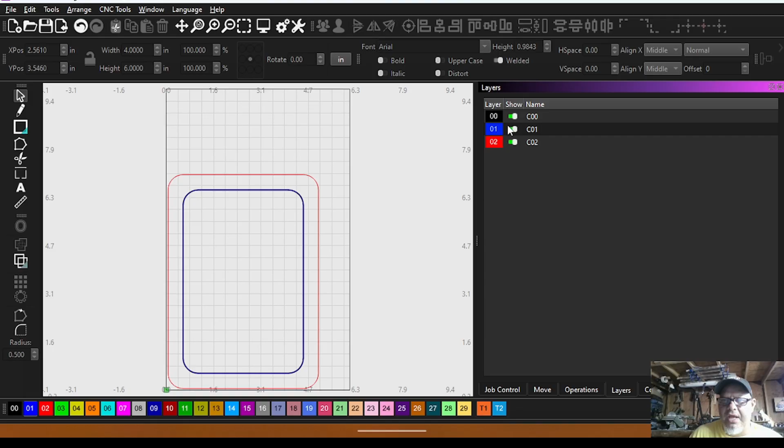So what I did was I went to the black layer. Let me turn off the other layers, the blue and the red, so I'm only looking at the black. And what I did was I selected it. Then I came up here and I hit new operation. Hit pocket, and I changed that to black fast. So you would put that in there. Pick your tool, so the ball, which is the bowl bit.

And you want to start out at the top, so you want it to be the start layer. The start depth is going to be 0, and then the bottom one, I wanted to go a total of 10 millimeters down. So for me to do that, I had to go 9. I went 1 millimeter less than what I actually wanted it to be. So I'm going to change that to 9.

And my depth per pass, you can make that whatever your settings are going to be. You have to test it, but I'm going to go 3 millimeters for depth per pass. So I'm starting out at 0, final depth of 9, and my depth per pass at 3. And my step over, I want to change that because this is the fast one. I want to go as large as what I can, which is going to be 50%. So leave all the rest of this the same, and then hit OK.

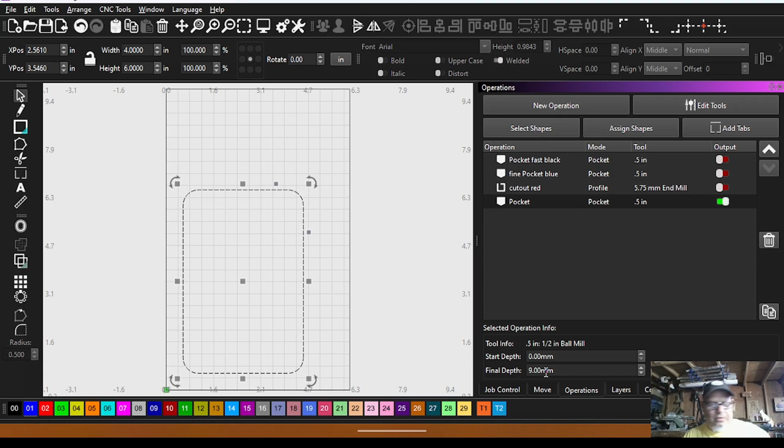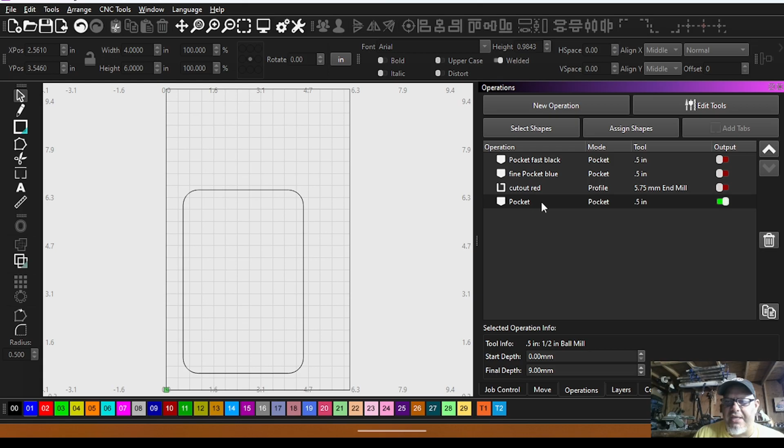Because when you do the next one, that's going to be your fine. It's going to go down and make it real smooth, and it'll need very, very little sanding. So, back to MillMage, and there we go. Now that's going to be your pocket. Remember, it's going to say pocket fast black. You're going to write that in there so you know what it is. I'm going to go ahead and delete that one. That was just to show you.

And I'm going to do one more. We're going to go into layers, turn off the black, only show the blue, go back to operation. We're going to highlight it, and then go back to new operation, and we're going to do a pocket again. Select tool. It was already shown there, but we're going to select it anyway, the 0.5.

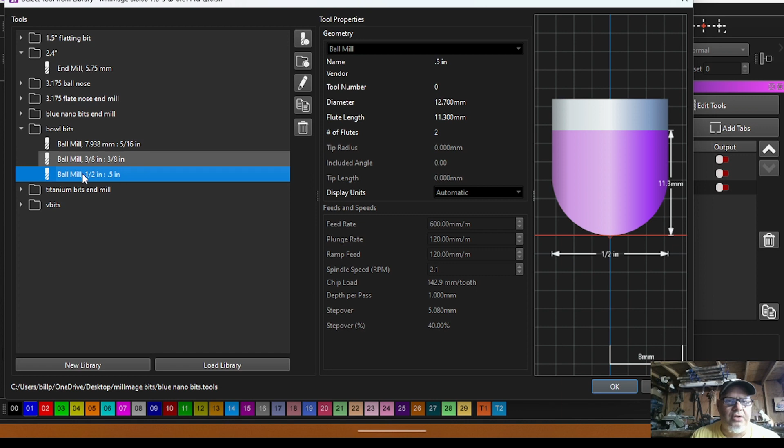Now we want to go 10 as our final. So you're going to want to leave 1 millimeter. You're going to start at 9 because you can't start at 10. So you got to start at 9, and you're going to go down to 10. That's going to be our finish. This is where we stopped the fast one, so we're going to start where we stopped, and then finish where we actually want to finish, which is 10 millimeters.

Now this is where you're going to want to change that to 3, 4, whatever. Of course, the lower this number, the longer it's going to take. It's only doing 4% of that ½ inch bit, so it's going to take a long time. But if you want that smoothness with hardly any sanding at all, then you're going to want to make sure that is what you're doing.

Leave all this the same. Actually, since this is a fine one, there's not much that's actually going to take out, so I'll go up to 1,000 feed rate, and I'll leave all that the same. The depth per pass, we do not want 10. I'm sorry about that. We want that to be 1. So we're going to start out at 9, and we're going to finish it at 10. Okay?

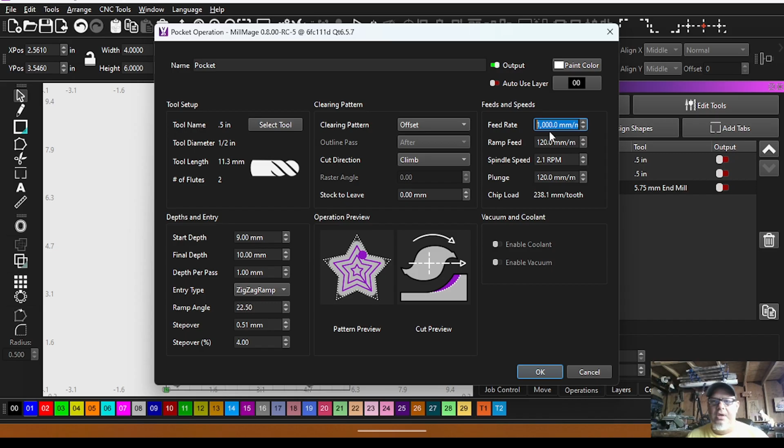So it's going to start, go down to 9, and then cut all the way out to 10, with a depth per pass of 1 millimeter. So it's going to actually cut that out in one time. And like I said, you want to make sure you change your step over, and change your speed to what you want it to be. Do your testing, make sure you've got your own feeds and plunge rate and all that figured out. Then you're going to hit OK.

Now I'm going to go ahead and delete that one. That is how I set them up, so I already have them up here. If you click on the black fast pass, you're going to see exactly what I told you. We're going to start out at 0, finish at 9, and go down 3 millimeters to do that.

And I'm going to use the highest step over that they have, which is 50%. And then I have the speed changed to 800 millimeters a minute. It was able to handle that absolutely no problem.

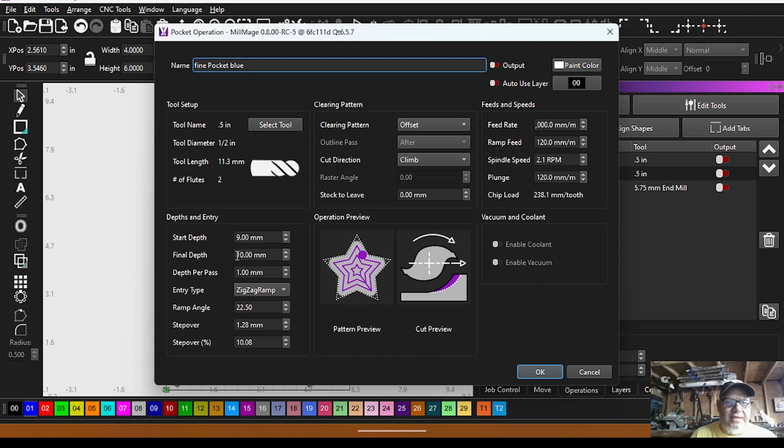Now the next one is the fine, the blue fine pass. You'll see I used a 1/2 inch bit. I started it at 9 because that's where I finished the fast one, and my final depth is going to be where I want it to actually be, 10 millimeters. I went down 1 millimeter depth per pass. My step over, I did 10 because I didn't want to spend too much time on a video for that, but if I was to do it properly it would probably be somewhere around maybe 4. I don't know, you have to test your own. But somewhere around 4, and all these settings are all going to be good for that.

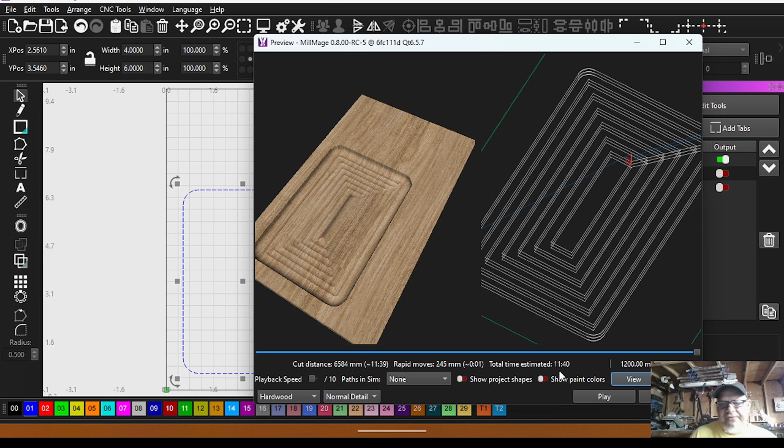Now if you click on the fast one, this is what I was showing you on that red cedar. If you click preview, it's going to take 11 minutes and 40 seconds to cut this out. Now this piece is 4 inches by 6 inches. That's exactly what I showed you on that red cedar, how you have those grooves and all those edges. That's what it's going to do - it's going to aggressively take out as much as it can.

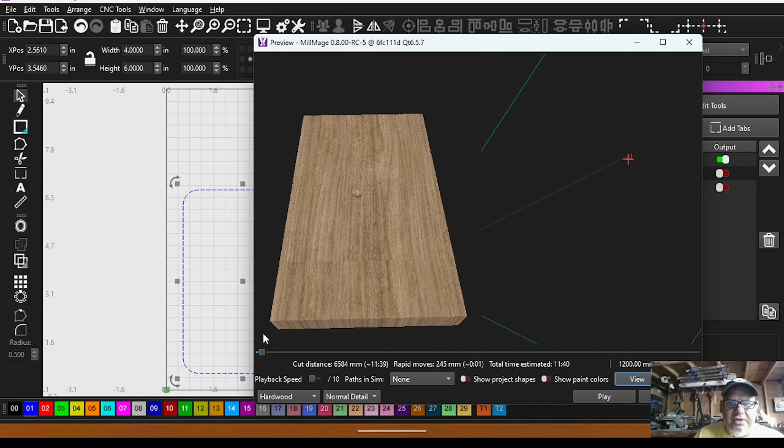So when you go through it and look, you'll see it's just going to start and go, taking out as much as it can, which is perfect. It goes down 9 millimeters and takes out a whole bunch of that material relatively quick.

Now if I go to the fine and click on it - actually, did I click on the wrong one before? Let me go to pocket fast. Let me turn these other layers back on. There we go, the fast black preview, that is what it's going to look like. You're going to see that. So it's got all that, 11 minutes and 40 seconds.

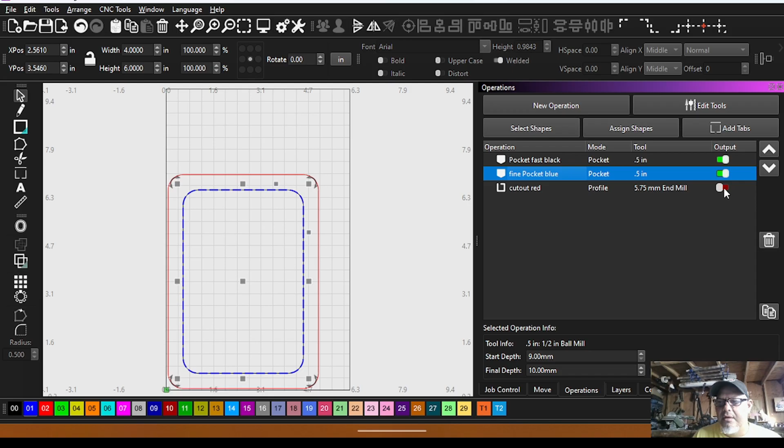And now if I click, turn the outputs on both of those, and click the blue - this one is going to take longer, you see, 47 minutes and 51 seconds to do that 4% step over.

But as you can see, if you zoom right in, you have hardly any of those lines going around. And you can do this real aggressive and real fast, so it works perfect for it.

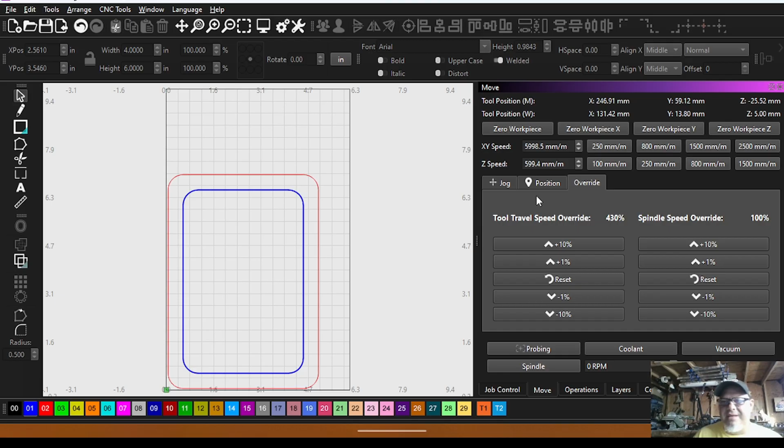Even though it's going to take more time, I was actually able to hit the move button here and override it, just keep increasing the speed. So I was actually going well faster than 1,200 millimeters a minute. And it didn't take but maybe 20 minutes when it was all finally said and done for the fine part, instead of 47 minutes, just by increasing that.

And you're going to want to listen to your machine, listen to see if it's chirping at you, make sure it's cutting okay, it's not smoking, and the wood chips are cutting out the way it's supposed to. You can increase it to whatever speed you need at that point.

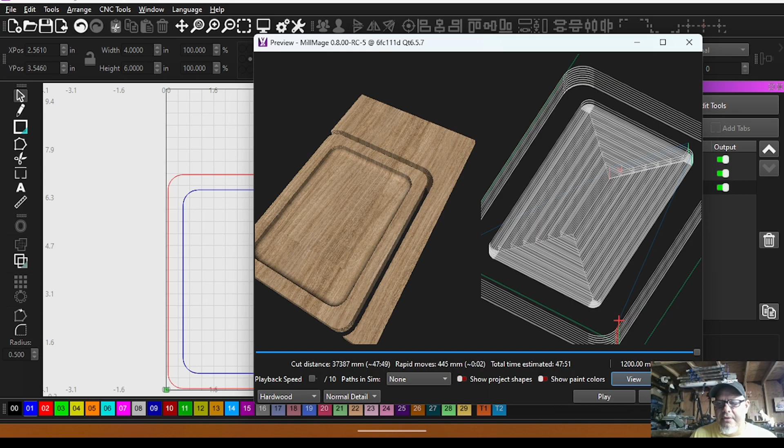So that's the fast black, the fine blue, and now we have the cutout, which is going to be this guy right here. A 5.75 millimeter end mill is what I used, and that took - no, that ain't right, let me go back and turn those off, put on this. That took 10 minutes and 46 seconds to cut that out.

I screw my wood to my board because I don't go all the way down to the bottom to cut it out.

I don't want to keep cutting my spoil board out, so I'll go down to about a millimeter or two, then take it to my planer, flip it upside down, and plane it gently to cut the rest of the wood out. Once it's almost all the way cut out, you can pop it out and sand it on your belt sander. That's the way I do it. No tape, sometimes tape, sometimes clamps, but I just screwed this down. It was much easier to do it that way and then plane off the rest.

Now Gavin, I think what you were asking is how do you get to the bowl bit, how do you add the bowl bit to it. So that's how I added it. I'm sure it's not the only way, but it worked perfect for me, as you can see. It did a fabulous job, came out perfect. The first one I did was small and I didn't go very deep. But just using the bowl bit for the aggressive cut, and the same bowl bit for the fine cut, worked out so much easier and quicker.

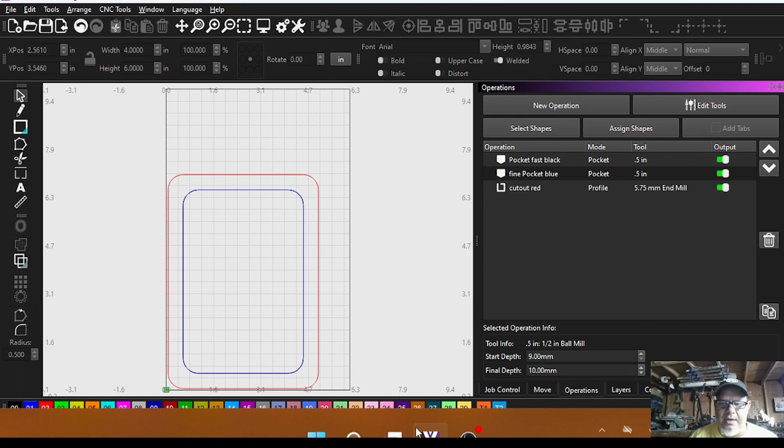Now let's jump back in here. What was so easy and nice is I started out here, so I unchecked these. I do not want to output those. If I had those outputted, I probably could have left these two there and it would have been fine, but if I had this one also added, it would have gone and done the whole entire thing. So the way I do it is I uncheck the ones I don't want to use. That's what's nice about having these colors, the color palette down here, you can pick and choose how you want them all to look. So by unoutputting these, it's only going to do this one.

So when you hit start, it's only going to do that one. When it's finished, you uncheck that, and then check the next one that you're going to do. So priority matters. Keep yours how you want it to go in order, and you can change them with your arrow keys here. Make sure you do have them right. You don't want to have this one on top, because you might mess up and be like okay, yeah, I'm ready to go, I got it, and then you end up hitting it, and your bit goes way down, and you're in trouble. So make sure priority matters, make sure you have them correct. Pocket fast, pocket fine, and then cut out.

Okay, so what was nice is I was able to use the fast pocket black. I went and clicked it. I came down here and homed it first. Then I went ahead and moved it to where I needed it to be on the wood, on my spoil board where I had my wood. And then you go ahead and hit work piece zero, work X and Y, use zero wherever you have it at, wherever you're going to have it at. If this confuses you, I do have a video on this, so go back and check out my other videos, you will see it. But what was nice is you hit your probe button here, this is the one I have, the block.

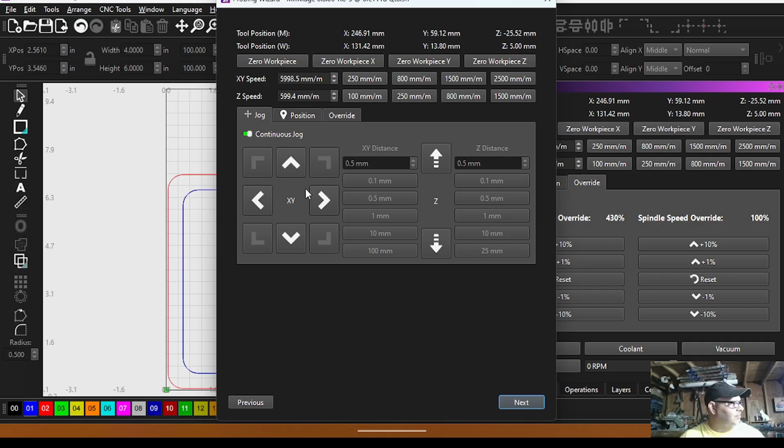Next, because I only have the Z. Now since my wood has not been cut yet, I don't even have to move my router. So all I got to do is go ahead and click next, hook up my clip to the bit, put my puck underneath it, and then hit execute on Z. And it's going to go down, hit it, come up, go back down slower, hit it, and go back up. Then all you got to do is hit finish. Now take your clip off and your probe, start your router. All you got to do is click start, and it's going to go ahead and do its thing. Once that's done, it's going to stop and raise it up a little bit. The computer knows where that's at. All you have to do is unclick the output for the fast.

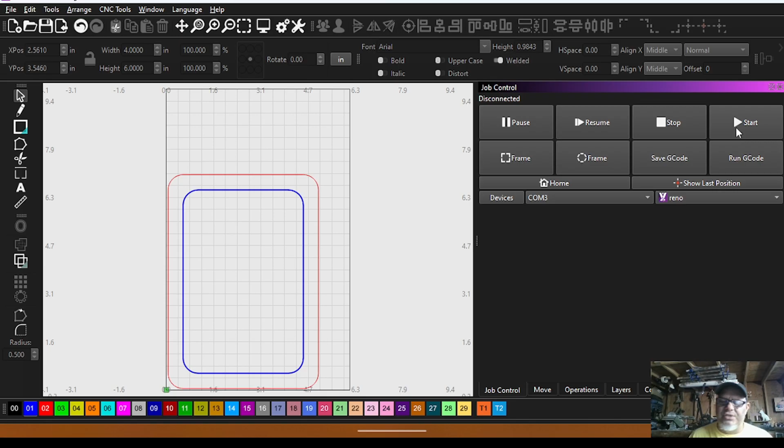Your bit is the same, you don't even have to change it. Turn that one on, go to job control, and all you got to do is hit start. It's already probed, it's already zeroed, so it knows everything that it needs to know. You hit start, and it's going to go ahead to the next step.

When it finishes that, you're going to go to operation. You're going to turn off the output for the fine, and you're going to go to your cut. Now you do have to change your bit for this one, so you change your bit. All you have to do at this point is you just have to...

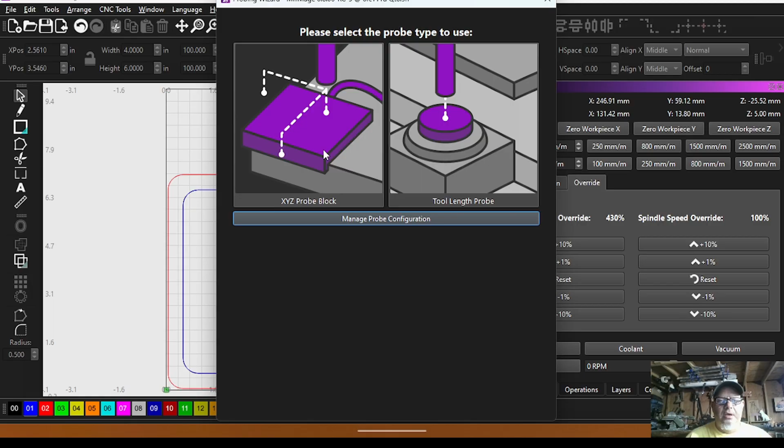Re-probe your machine. So you go to move, come back down here to probing, block, next. Now you don't want it to be, because it's going to have where the material is taken out. Now you want to jog your machine at this point, jog it to a spot of the wood that has not been cut or touched.

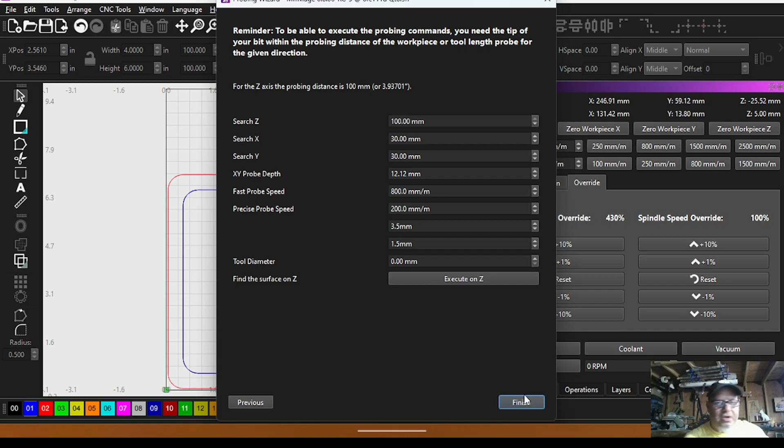Once you get it to there, hit next, put your clip on your bit, put your puck underneath it, execute on Z. It's going to do its thing twice, finish, and all you got to do is take the clip off, the probe off, start your router, come to job control, and hit start.

So what's nice, if you have the same bit on these, you don't even have to probe it the second time, because it already has the settings for it. You just got to uncheck the output for that, and then check the one for the next one.

So I don't know if you knew that, if a lot of people knew that, but that's a little tip out there for you.

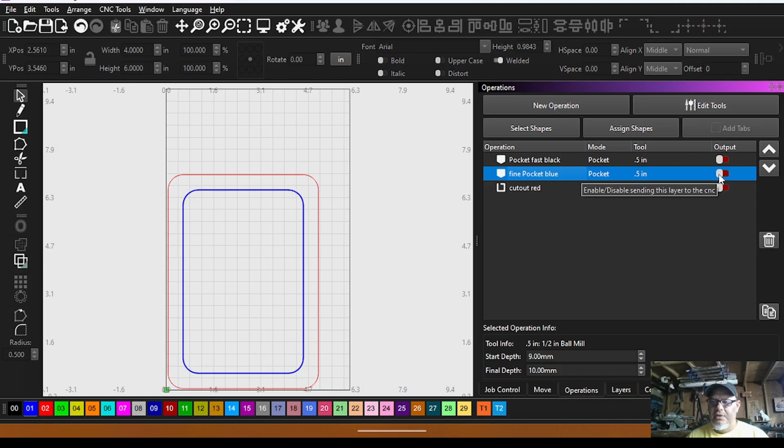So that was nice. When I did that and I realized that, I said, oh, damn, I like that. You just got to probe it the one time with the one bit.

Run your fast black, it finishes, uncheck it. Check your next one, because that is the 0.5 ball bit. Go to job, start, run it, do its thing.

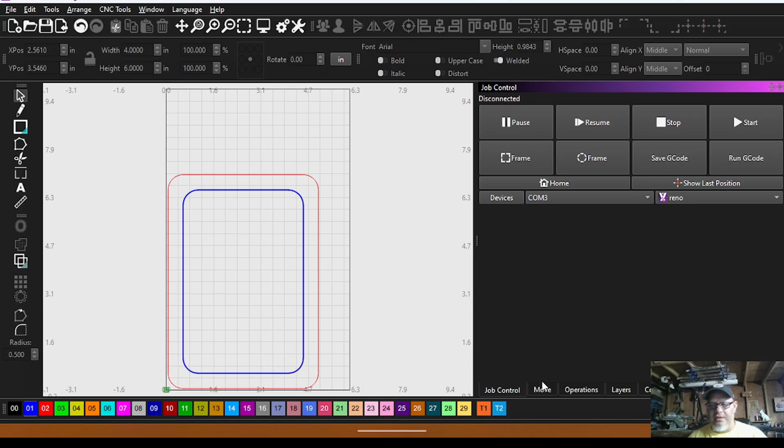Uncheck it, change your bit, reprobe your machine for the next one, and all you gotta do is then just hit start and it's done. So I don't know how many people knew that, but I really like that. That was really nice.